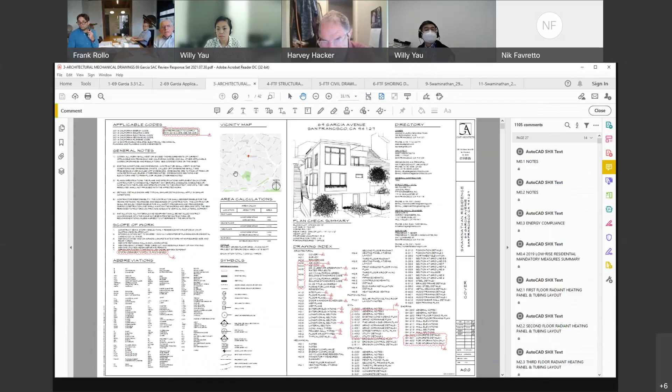We've gone through those, so there you go. If you go to 1.0 there, there you go. We have to get there. 1.0 shows the plan, and then you showed it, there was a photograph.

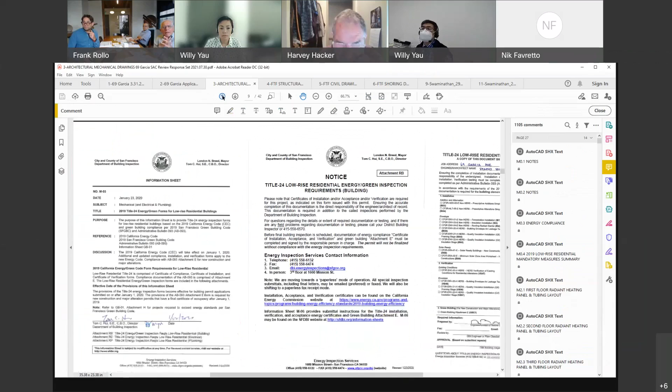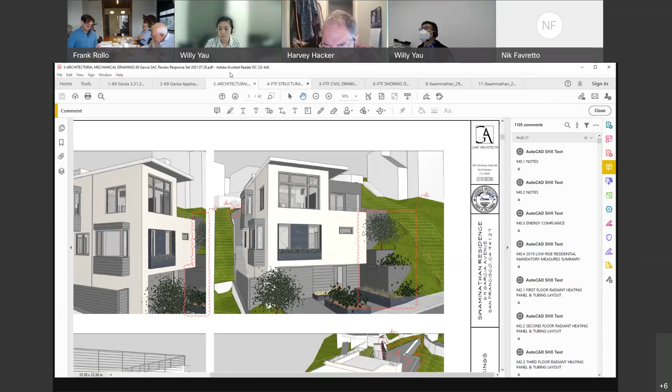Okay, so intent met. The next item is a geologic review.

Lou, there were various documents, but the one that's critical to the geology part. Do you have a copy of the minutes in front of you, Lou? Yes, I do.

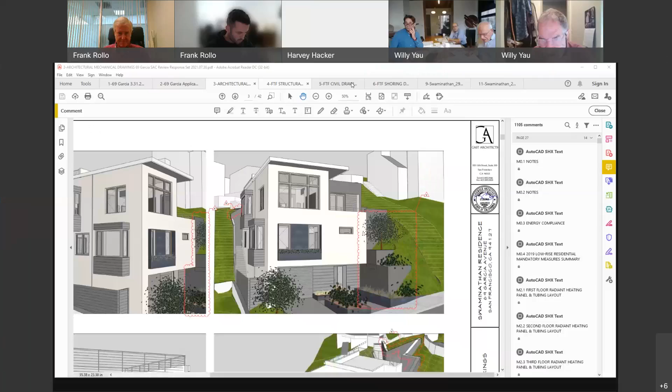Okay, so under geologic review, you had item 11, which basically discusses the characterization, and you requested documenting the existing conditions on a geology map, detail mapping of the chert rock. So maybe we can go to that document, and Lou will bring up the document, and there you go.

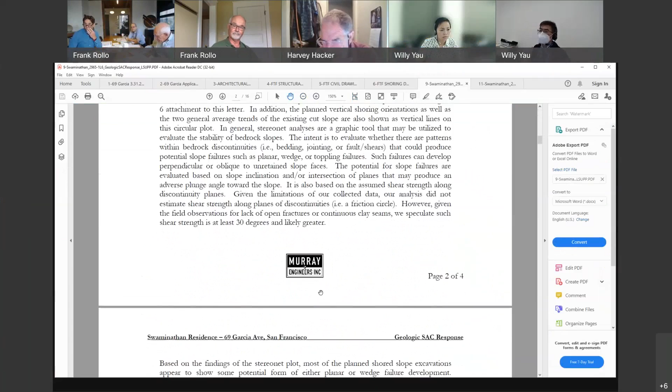And I guess the first thing we need to look at is the detail mapping, which would be figure 1. Thank you. Sure. There you go.

And then the second was the orientation of the bedding, and then we can go on from there. But go ahead, Lou, why don't you give your comments? Yep, thanks, John. Sure, everybody, for putting together your supplemental information. Appreciate that. I had a couple comments about it.

I think the main takeaway I get is, although you kind of discredit the whole procedure a little bit, I think the goal was to characterize the nature of the bedrock there in anticipation of putting in these 30-foot cuts, shored cuts. And I think what comes out of it is, although there are localized areas subject to raveling and sloughing and sliding and stuff, it's a ballpark estimate of the magnitude of those, the volume that's possible.

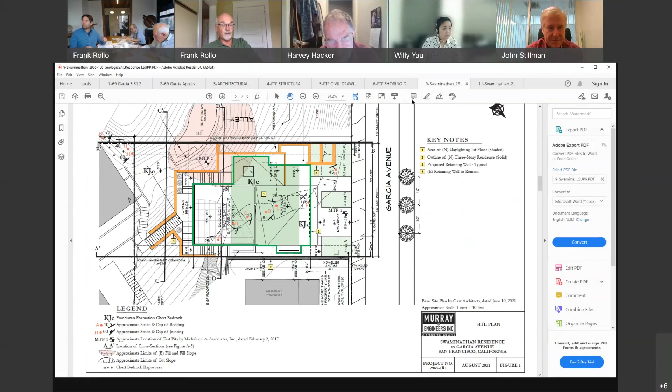Figure 6, the photo of the slide plane there, the rock scar. I'm not sure where that is. Yeah, that's at the base of an existing cut slope there.

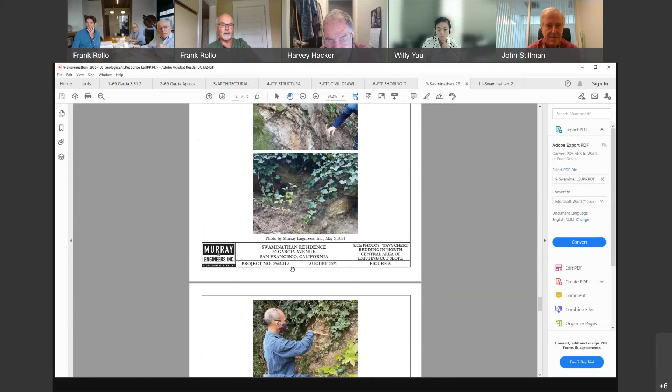We'll put that figure up. John, if you don't mind, we'll let Lou. Oh, sure, yeah, no worries. Yes, then you can comment too. That makes sense. Sure, there you go.

Is that Lou Gilpin standing there looking at that? No, it's rock. It's Mark Bauman from our office. Okay.

Okay, what did you want to say about that, Lou? Well, I think what would help the contractor and me would be some kind of a description of the joint spacing, the fracture spacing, the potential rock fall volumes. Because although it's going to be localized, a block that came out of that scar could take out two workers if it were in the wrong position.

And I think that was kind of the intent of trying to characterize the site hazards for the construction that's coming up. Typically you do that by saying, well, okay, here's a wedge failure, and here's the spacing on the various elements of the structure that allow 3-foot cubic foot blocks to fall out of it. Some of that information may be captured in the talus pile, and I know that's pretty much just real small stuff, but there may be a block or two sitting in there that could give you a hint.

Are you requesting that? Can I respond? Yeah, go for it, please. No, John. Yeah, Lou, it's really difficult.

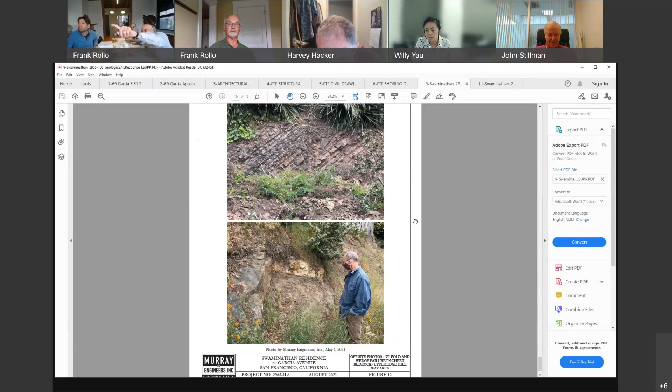I think when we went out there, we had a little bit higher expectation of trying to find more joint orientations on that existing cut. We didn't feel confident in some of the fractures we observed, so we really only had two primary joint orientations. I don't think we have enough information, given where the cut slope is at this point, to form an opinion as to the magnitude of a wedge failure.

Those two photos were taken near the quarry slope failure on the other side of Edge Hill Mountain, just to emphasize the magnitude of movement we may be looking at. The other photo above shows how wavy and lenticular some of the chert bedding can be.

My opinion is that as they're cutting, Lou, they're going to be doing a top-down construction approach. Having that shored really mitigates the concern. I don't think I have enough information to form those opinions in terms of the magnitude.

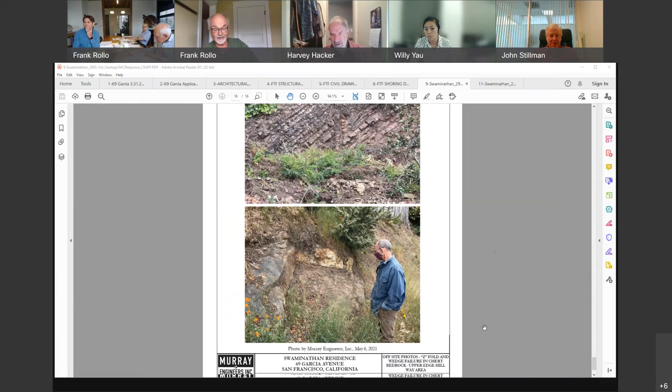Yeah, I was trying to put in site photos, I was contemplating doing it or not. Sorry to budge in there. It does say off-site photos there, Lou, on the title. Figure 12, off-site photos. Okay, okay.

So, well, Lou, go ahead. Moving forward, I still think there's a concern for letting the contractor know what kind of size issue they're dealing with. If you just put a pattern bolt set in there, you may hit one of these wedges, or you may not. I think it needs full-time observation by the geologist, and they need to spot the locations of the bolts according to the structures and bedding.

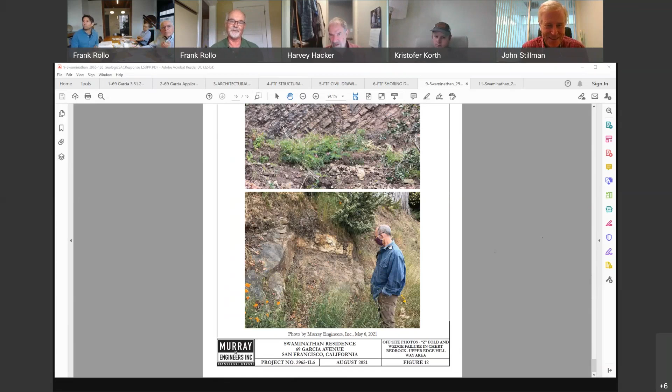And if that upper picture in figure 12, I don't know where to put the bolt. In the lower one, you get a hint that a block is coming out of there. So it's going to be hit and miss.

Sorry to interrupt. I agree, and that's what we state in our letter, that we would like to be out there full time to observe the cuts, and if we can provide information at that point, absolutely we would. It's really tough to figure this all out, but having us out there, if we see something adverse, we could raise it at that time.

I'm going to recommend, and I hope the SAC agrees, that the bolt pattern and spacing shown on the shoring drawings be interpreted as illustrative only, and that the actual spacing and angle of the bolt installation will be established during the excavation.

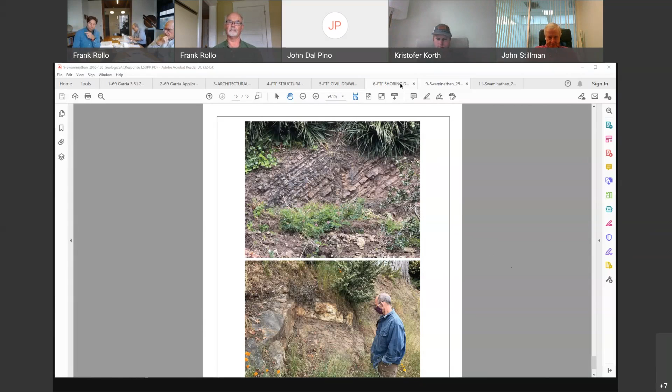How much of an angle change are you thinking might happen? Those things have to be built in advance, and it's not like every tieback can be at a different angle. I don't envision any angle change, but I need to put that in. Because you change one angle, it affects another tieback. It affects a lot of stuff. So no, that's a judgment call. I don't expect that to be the issue.

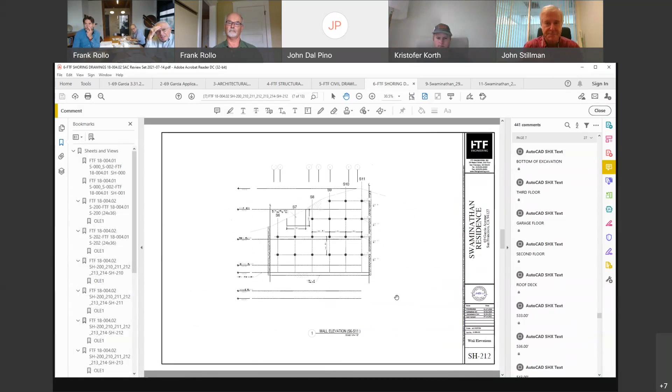The expression, to me, and I think to both Lou and I, it's a matter of you're going to come upon a wedge that if you keep excavating, it might fall and hurt someone. So you might want to move that bolt closer to the previous bolt, that kind of thing. Okay, and the other cut that needs...

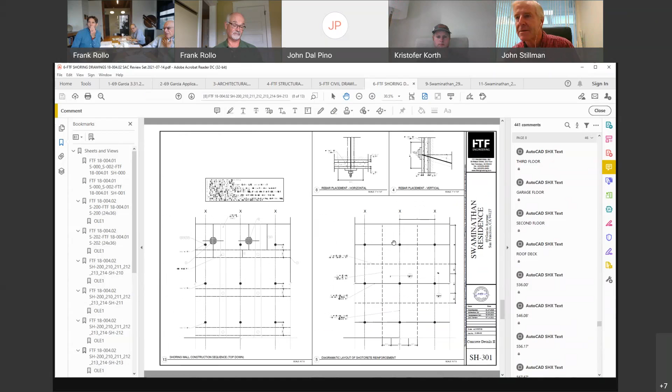to be looked at is the cut that, I think my orientation is right, is on the east side where you're coming up the easement to put in those soldier piles. We don't have soldier piles anymore, we just have the wall. It's a concrete wall. But you're making a cut there. Oh yeah, of course.

And to gain access to that, because you're so close to the residence at, what is that, 69? 69? We're 69, oh sorry. Well what I'm saying, John, 71. You've got a slope below that residence, and then we're gonna make a cut through in the easement. So it's important that cut be looked at also as part of the excavation, as part of the special inspection.

Yeah, okay, can we dive into where the cut is? Because my understanding is the cut's actually at the easement to subject property line, and that excavation into the easement isn't as extensive as we might assume it to be. Perhaps John and Matt might want to address that a little bit. I understand the shoring wall to be basically in the easement at the property line. Yeah, but so the cut though has to be a slope at that, isn't there a temporary cut being made?

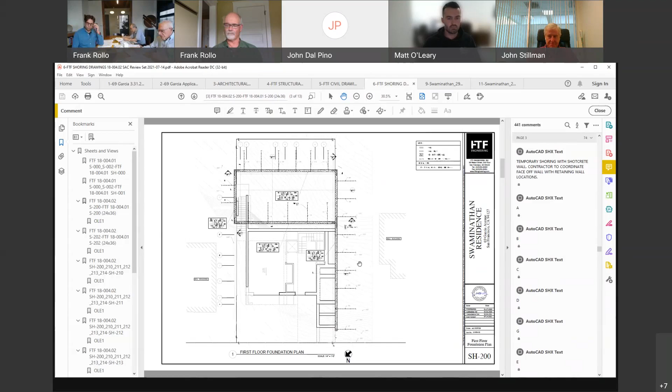So you're gonna come up through the center of the site to get to each level for the top-down work. Right. The last couple drawings in our set show the working from the top down, grading level, with increasing larger flat spots, the work starting up in the southwest corner and then working down. So that's SH 401. 400 shows the plan of how it looks, and 401 shows an idealized stepping down.

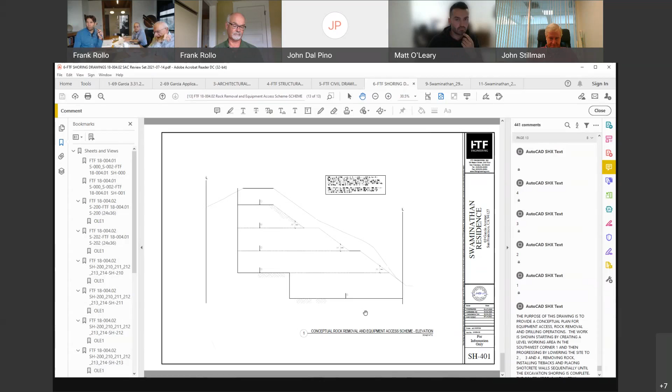So you're gonna walk up those inclinations, and then cut down and put your bolts, so your rig will sit on each pad as you go down. Right, and it's similar looking the other way, looking to the south. Okay, alright, so that explains it. Access through site, okay, not easement.

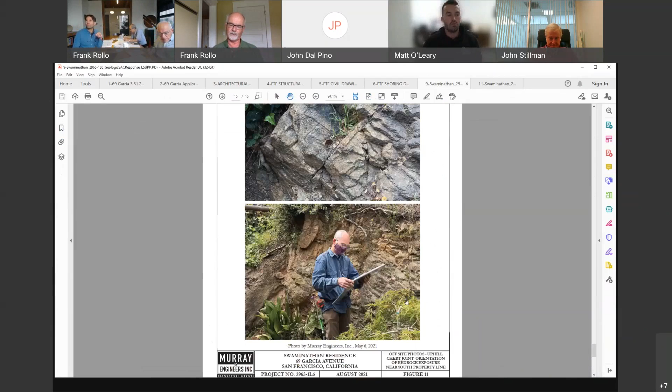Lou, any other comments on the geology? This may be a formality, and I noticed it on the original report too. John has a GE stamp, but there's no CEG stamp. Since this is a hillside ordinance kind of thing, I don't know if the county would require that, but that's just formality from my point of view.

He's got his CEG number 1869, and I think DBI will require that. John, you're gonna have to put your geology stamp on there too, for the May report as well. The May report and the August 2nd report. We can do that.

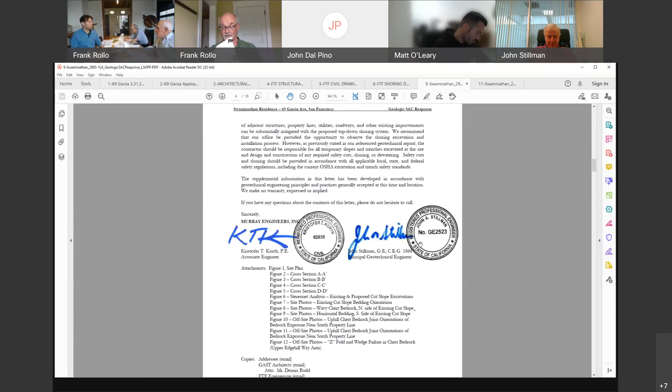The May one is 2018, isn't it? Yes, and then August 2021. Okay, yeah, I think so.

Other than making sure there are notes about continuous observation during rock bolting, I don't have any other comments. So provided that note is there, and it should appear multiple times on the SH drawings. For example, I'm opening SH 212. That note should be on that drawing.

I'm opening SH 210. That note should appear. And I believe there should be the special inspection observation form. You can show that, there's room on SH 001. You can put it on that drawing if you wish.

Check the appropriate box having to do with shoring and excavation. I think it's the excavation. I think it's on the structural. Yeah, I was gonna say, it's on the building structure. Yes, and the special inspection requirements are on the building structure set.

Does this need to also be on the shoring drawings? Yes, because you're gonna be making your cuts on that. It will be box number 12 and 13, and 21A. Yeah, okay.

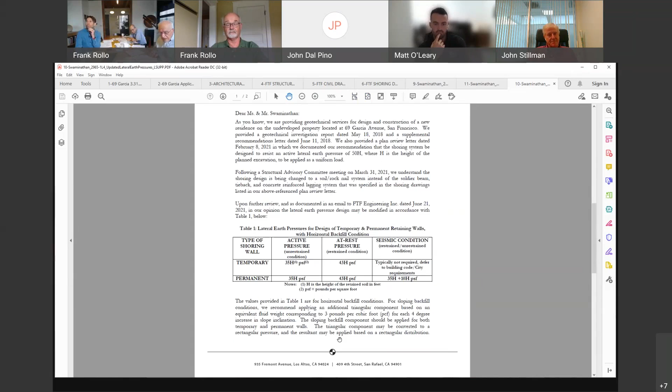Okay, letter number 11 is the geotechnical plan review letter. It's a 3-page letter, signed by Kristofer Korth and John Stillman, and the appropriate stamps are on that drawing.

Is that correct, or do we need the CEG stamp? No, you do not. It's fine, it's a geotechnical record. It indicates that Murray Engineers have reviewed the architectural, structural, shoring drawings, as well as the calculations, as well as the civil drawings.

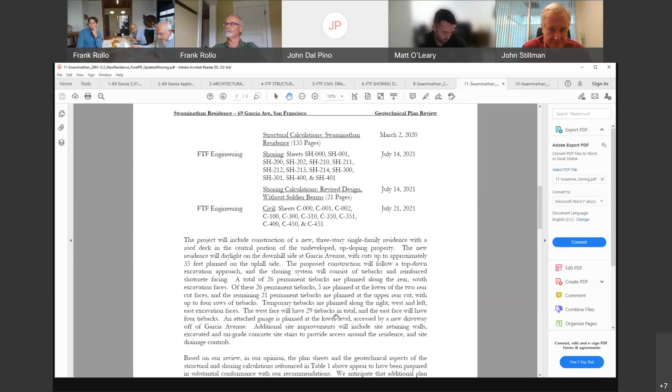Can we put that letter up on page 2? It says temporary tiebacks are planned along the west and east excavation faces. The west face will have 29 in total, and the east face will have 4.

I think I counted them correctly, and I agree with that. It may be that you may want to number them so that if there's an issue, if you number them on the drawing, when they make changes as to their location, they can just indicate what that bolt represents.

So I'm suggesting that the shoring drawings number the bolts in the elevation of the rock anchors, provide a number at each bolt, so that when the final report is sent to DBI for the occupancy permit, that as-built drawing will show the same bolt numbers, and if there's any changes, you'll see where the change occurred.

Okay. On that same letter, the paragraph starting 'based on our review,' it says we note that the foundation contractor is responsible for the stability of all temporary excavations at the site and the impact on the neighboring structures, property lines, and utilities.

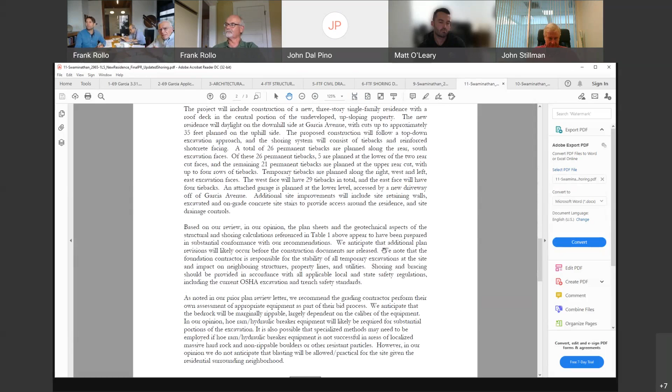I think we can modify that statement, though the exact locations and inclination will have to be surveyed in. Right now the soil bolts are part of the design, the numbers are part of the design, all that. What we're saying is how you get there, how you do it is your responsibility, but you're going to put them in where we tell you to put them in. I understand the concept. We can work on rewording that. Thank you, and so that's an action item.

Also, this is a hard one. The last paragraph on page 2, I guess this is where the driller - Matt, you're on, but John, this is both you guys - it says we anticipate the bedrock will be marginally rippable, largely depending on the caliber of equipment. In our opinion, hoe ram and hydraulic breaker equipment will likely be required. It is also possible that specialized methods may need to be employed if the hoe ram and hydraulic breaker are not successful in areas of localized massive hard rock.

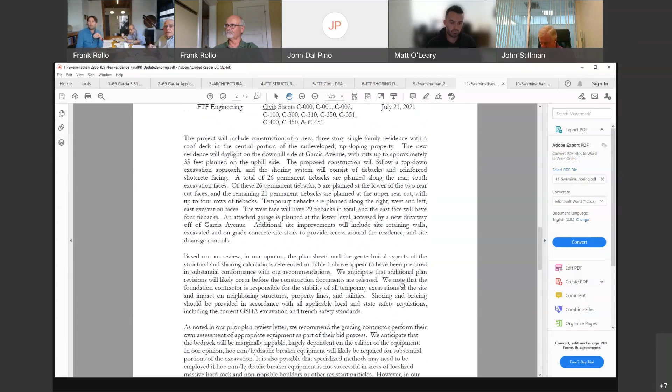As far as I'm concerned, the Murray engineers have adequately addressed their review and cautioned the contractor as to the difficulty of excavation. The only item that needs a modification is what I'd call the third paragraph, where stability is discussed - well, it's the second paragraph starting with 'we note that,' and the third paragraph starting with 'we anticipate that.' Is that correct? Correct, those two sections, yes.

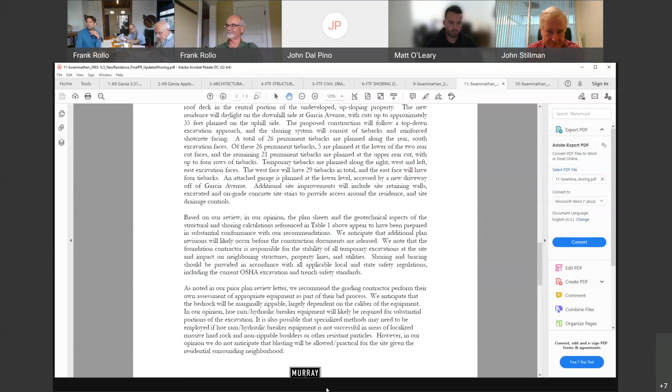The scope is tailored to a drilled soldier pile, and I recommend to the SAC that we request a new proposal, and that the cost of monitoring be realistic and not overly conservative. I would suggest that you keep the seismograph on the site throughout the excavation process - I think it's a couple of months - and he's giving you a continuing monitoring cost for that. Is that acceptable, and I know the owner's not on, but will you convey that to the owner, Dennis?

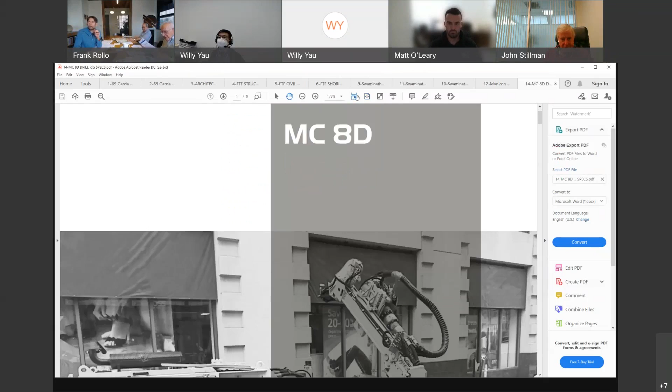Document 14 is a fact sheet on the type of drill rigs being proposed, for all the tieback work. Document 15 was the earth retention, I guess, for erosion control and measures.

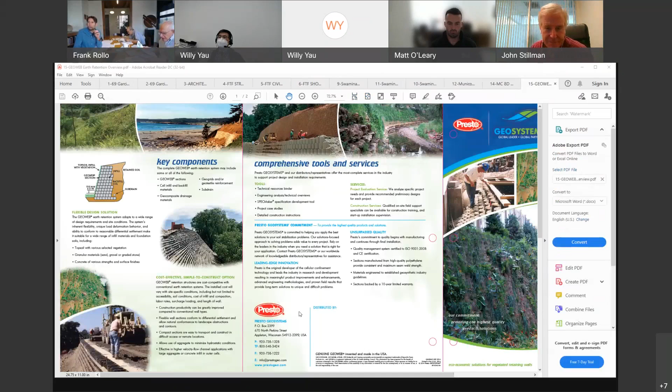Item 16 is a shoring for excavations within the street. I guess that document is something that's done between you and the city. Correct, this is a sample exhibit that we'll have to do with the Department of Public Works.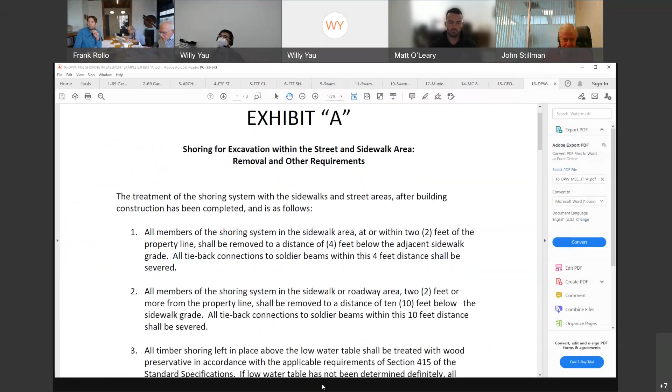And number 17 is a lateral tieback agreement and a consent to use the crane, and that's really beyond the scope of the SAC, so I have no comment.

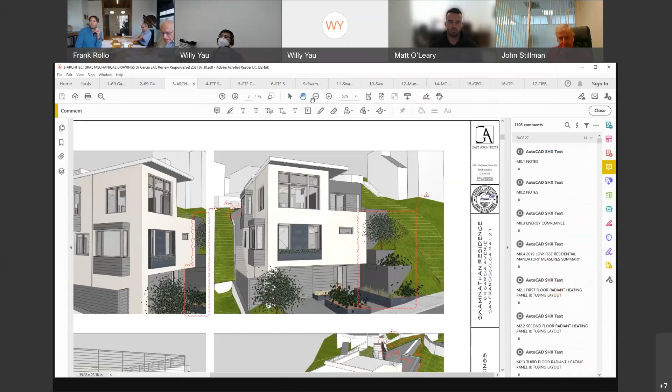Okay, and that's it. Now we can go to the drawings, so we can walk through those at a pretty good pace. Let me keep my organization here. Okay, so the next item I'd like to discuss is the civil.

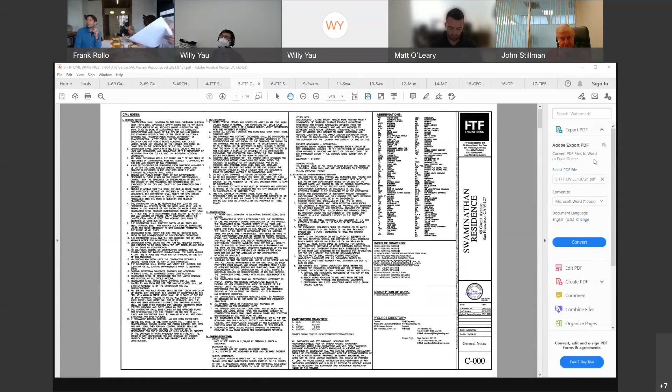We don't have a civil member of the SAC, so I will ask everybody to put up the civil drawings, they're number 5. We do, Skye's on the call. Thank you, hi Skye.

Would you do me a favor, Skye, on your drawing? And I'd like this to occur on all plans. For some reason the H line, which is a very important grid line because you have a wall behind it, is not shown. We show the A, B, C, D, E, F, G, but I'd like the H line to be shown, especially on your civil drawings.

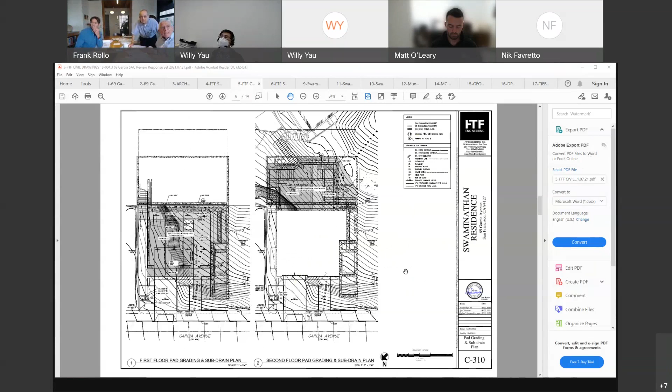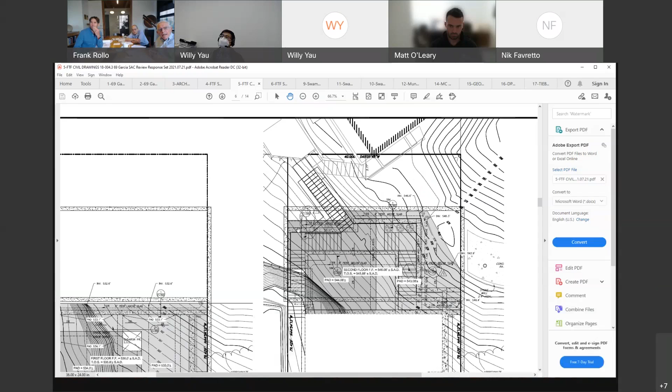If you look at C310, for example, see where the stairs are located? That's the H line. No, up there, the ones that go east-west. See the wall right there? That's the H line. I think it's important we show that line in all the drawings.

Skye, are you muted? Oh yeah, I can add that. Okay, no worries. And if you look at the shoring drawings, it's the same thing. For example, SH202 shows the F and the G, but not the H line, where there is in fact a significant wall. I would note the H line is missing also from the architectural drawings. We'll add them there. I don't think the civil shows any grid lines for that matter, so if we're adding the H, we're adding all the grid lines, not just the H.

Can you do that? Yes. Is that difficult to do? No. Okay, that way everybody out there knows, hey, we're working along the H line. Anyway, it would make it easier. For dumb geotech minds like me, it helps.

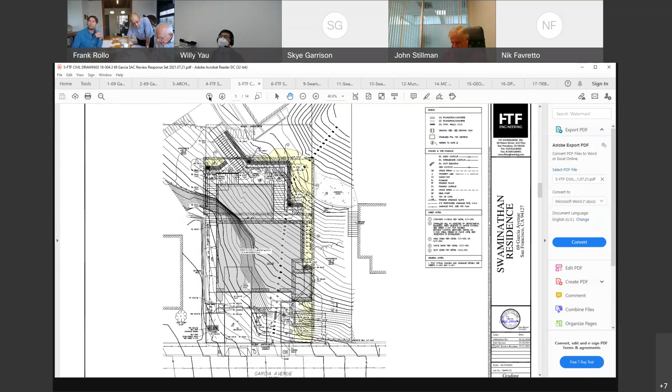Let's go on. The other thing, Skye, on your drawings I would like a note 9 under excavation, underpinning, and shoring. It'll be note number 9 that states something to the effect that all excavation shall be performed under the full-time observation of the CEG.

And number 10, all tiebacks, installation will be observed—tieback testing will be observed by the geotechnical engineer. I guess that should also go on the shoring, but we'll get to that.

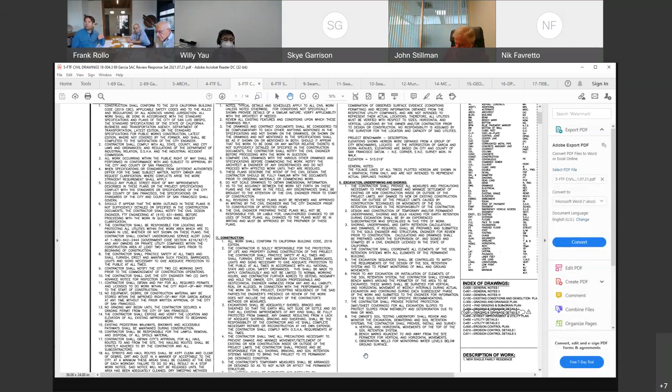Frank, this is John, are you talking about Skye's drawings, the civil, or mine? I'm talking about Skye's, on sheet C000. Okay, I'm just wondering if that's redundant, because Skye's work doesn't really start until my work time, all the civil stuff is being done. But she has a section 5, which is excavation, underpinning, and shoring. I'm just wondering if maybe that's redundant. It's not.

It is redundant, but since it's there, no need to take it out, just add a note 9 saying all excavations shall be under the full-time observation. John is right, you don't have to say anything about the tiebacks, just observation by the geologist, full-time observation.

I don't want it, it's hard to have all the language in reports and different sets of drawings say exactly the same thing, exactly the same way, so redundancy. Dennis, can you make sure that we say the same thing on all drawings? Yes, okay.

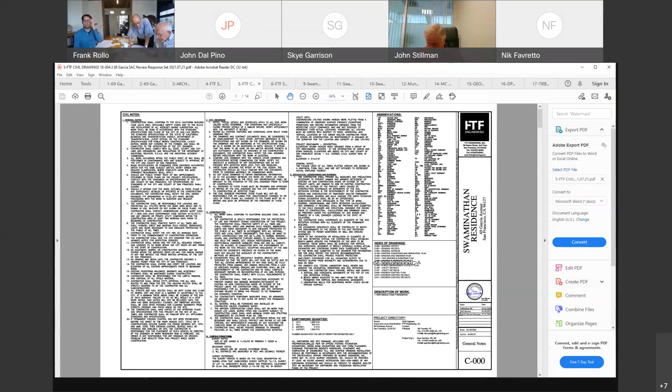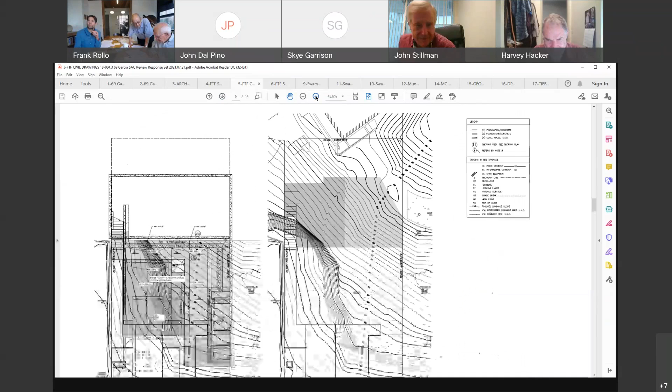C3, the retaining wall, drawing C350. I'm sorry, C310. That's very hard to pick up in this drawing, the subdrains. And to me, that's what's critical on these drawings.

So perhaps, for the benefit of those of us that wear glasses, if you could indicate—they sort of get lost along, for example at the H line, behind the H line it's sort of lost in there. I see the cleanouts. Anyway, if you can somehow just bold those a little, however Skye would like to add clarity to the subdrains is fine with me.

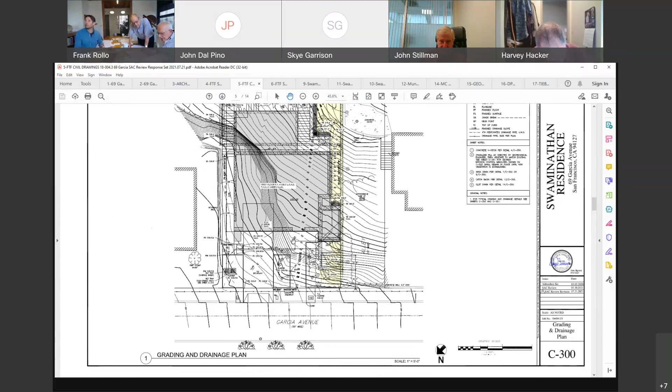She used color on the previous plan to indicate the geogrid material, and that really stands out nicely. Whatever you think, Skye, to better illustrate the drainage. Yeah, I can make the lines colored and bold.

The shoring wall is going to have more of a weep through the wall that's more continuous than a solid pipe at the bottom, which is why you don't see a pipeline behind that wall. Okay, so you'll be taking these drains, taking everything to Garcia, so you're going to have penetrations.

How do you take them through the wall? The shoring wall will weep through, and there'll be a gravel pocket between it and the house wall, which has the subdrains at the bottom.

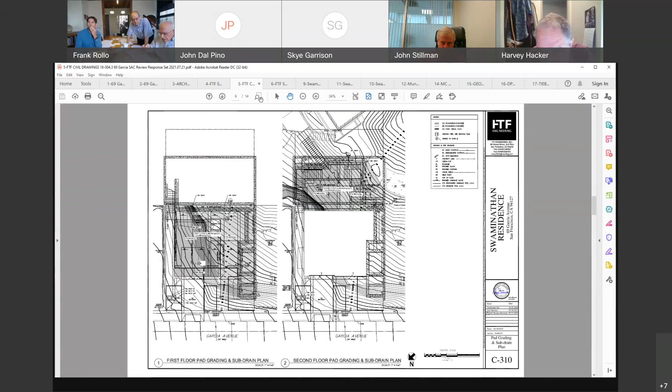Okay, but what about the H wall? You've got a whole series of walls, and only the H wall has the void, the fill in.

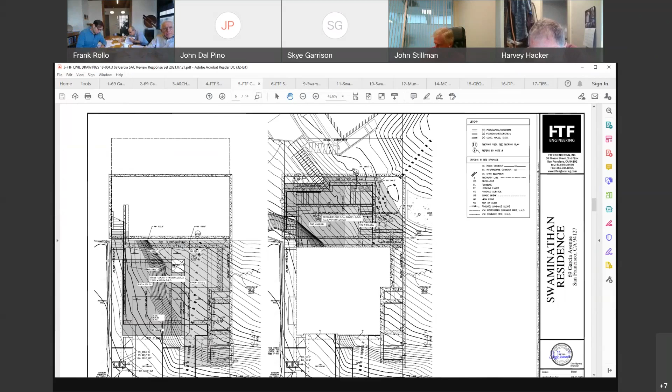Maybe we should wait till we get to the shoring drawings, but I'm asking about the penetration details—how you take the subdrains from behind the wall to the street. Those are going down under the mat slabs, and then there's piping that goes to the left side of the site.

It goes under that walkway on the left to those catch basins and the planter by the street. So you're penetrating through the mat, or putting them under the mat? They'll be under the mat. We added a couple details showing how the pipes get below the mat. Could you put up C350?

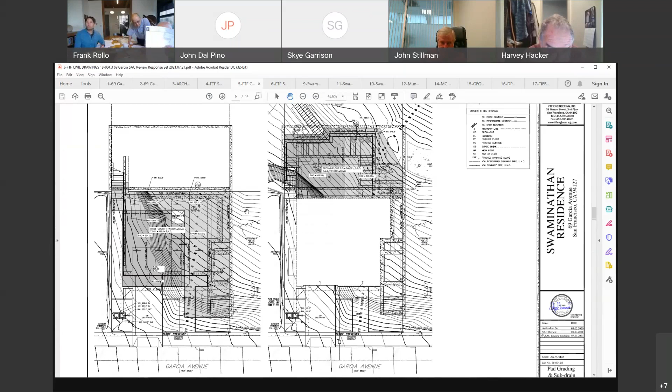There are the details. Now, which one shows how you get under the mat? We have detail 11 and 12, which takes the subdrain that's behind the wall and ties it into the drain below the mat footing. Oh, I see. 12 is up there at the back wall.

We have the pipe coming down through the footing slab. Oh yeah, okay, I see. And then that runs under the mat all the way to the catch traps and whatever. Okay, got it. Well, thank you.

As far as a member of the SAC, you responded to all the issues I had regarding civil and drainage. Do any of the other SAC members have any comments regarding the civil drainage? Not hearing any.

With the changes we've discussed, no further review is needed, and I'll frame that in the final. We've dealt with the architectural. The next one is the shoring.

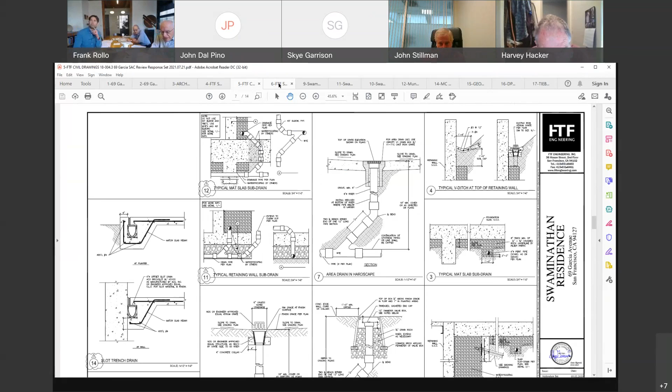You're on, John. Well, I can see it's completely different from the last time we met. We're changing into a different system, which is why I wanted to illustrate it a little with a couple samples. Apparently, this is the way to go.

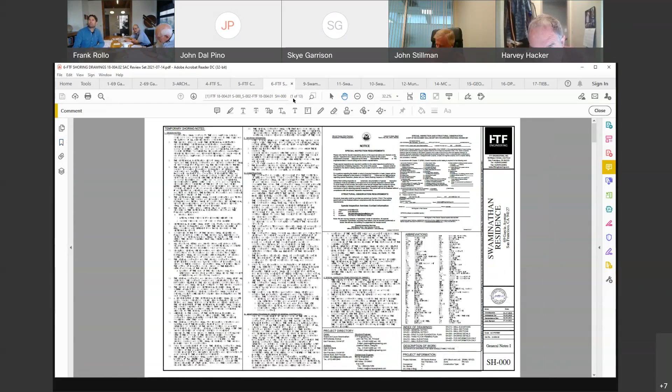But the only thing I noticed is the spacing is basically a 7x7 grid. Most of the jobs I've done in my whole career used 6x6 maximum. I wonder if this spacing change could affect safety, or violate OSHA, I don't know. But I've worked many jobs, all using 6x6 grid maximum. So this is apparently about sometimes 7x7, but not all 7x7, only certain areas. So the question is whether the spacing is adequate, if it's permissible.

Well, I guess, John, as a member of SAC, I think because we put the requirement that the bolts will have to be located with guidance from the geologist, the 7x7 is the maximum spacing they can allow, but the geologist may in fact require closer spacing in some locations, and that's why it's important to have a numbering system.

So I don't know, Lou, do you agree there isn't any OSHA requirement as far as bolt spacing, but you're right, it's very common to use 6x6. In fact, I've used 4x4. Lou, are you comfortable with the 7x7, knowing it's going to be observed full time?

Yeah, I am. There's some huge loads on those bolts. I imagine the designs compensate for the spacing, and if they go 6x6, there's going to be very little room to move them around and optimize them. It's just going to be crawling over yourself. I understand what John's saying.

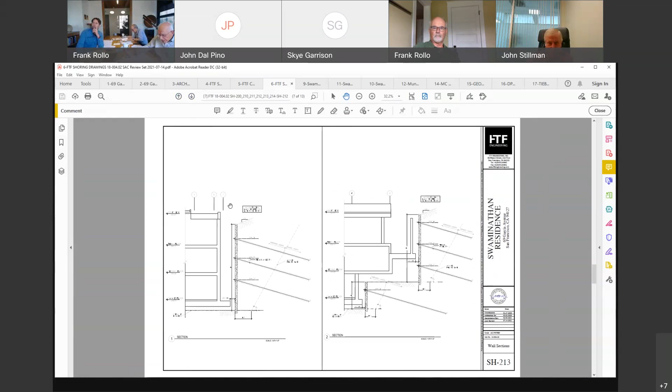Would you mind adding a note that the tieback installation and testing will be observed by the geotechnical engineer? I will if it doesn't already say that. I'd be surprised if it doesn't.

It says the geotechnical engineer shall submit a complete report on the tieback testing to the shoring engineer and the shoring subcontractor as soon as possible following completion of the work. It's implied, but not stated directly. So maybe the lead sentence would be that the geotechnical engineer shall observe the drilling and testing, and then the second sentence would be that he's got to report it. Yeah, that's fine, I can do that.

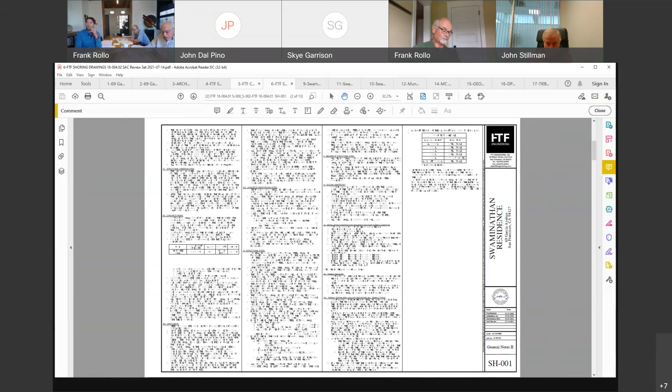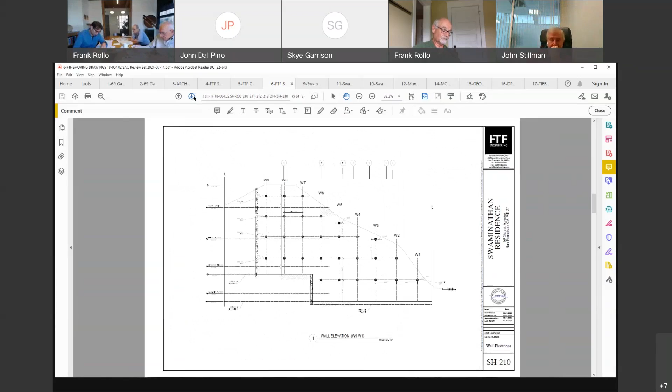Thank you. And also, if we go to drawing SH210 as an example, what's not shown, I'm just using this drawing, are weep holes. There are no weep holes shown in this shotcrete wall. Well, we showed it on a detail that shows the Miradrain that we put, and I think we showed the weep holes there. Okay, would you be kind enough to point that out to me?

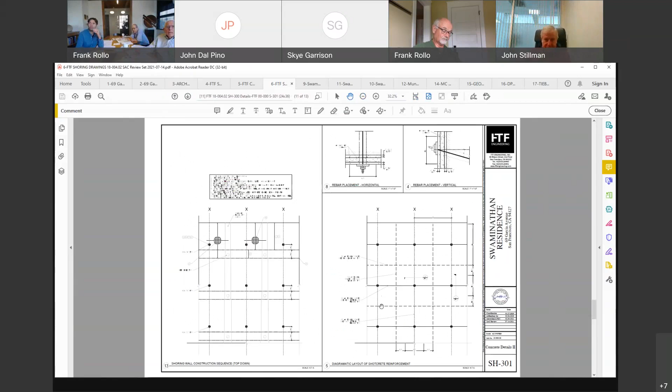It's on one of the new sheets. Keep going, Dennis. Go back one. Well, we introduced a strip of Miradrain there, that's a chimney drain between. Zoom in on the detail on the left, if you would. It's just a 4 foot wide, or 2 foot wide, that's all you need, like a chimney, draining it down. Yeah, well, that's what we have. So it's dotted there, the dark dots are the tiebacks, and then there's the Miradrain going down. SH301 is the weep hole.

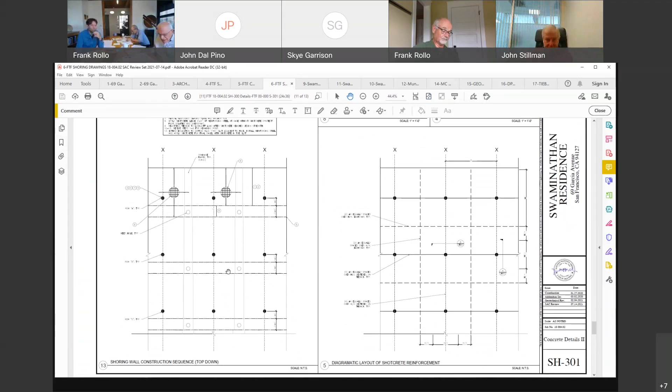Okay, I think it says it right here, weep holes typical. Yeah, but what it doesn't show is the strip drain. Normally, would you put a strip drain behind? You hang a strip drain, and then you have the weep hole. So if you've got 7 foot spacing, you'd have a strip drain in the center at 3.5, and it's usually 2 feet wide, John? Yeah, 2 foot wide, adequate. It's just a chimney down to the bottom. Yeah, well, that's what is shown.

And back to the inside. Oh, I see what you've done. Oh yeah, there it says drainage fabric typical. Now, does that occur here, these lines? There's your chimney, the intent's for it to be everywhere. So that's on all shoring walls? How do I know that? It just says shoring wall construction sequence. So the contractor's gonna know that. Yeah, I hope so, but I can write 'all shoring walls.' Yeah, please.

There was an incredibly large slide that occurred on Edgehill a long time ago. Lou can give you the history of it, but we're just taking the precautions that are needed.

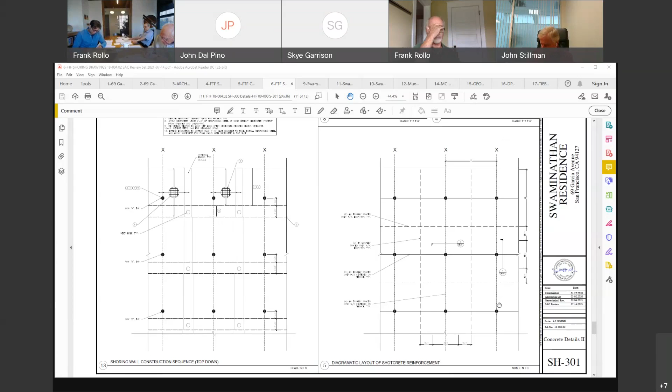We're not gonna lock off the earthquake load, that's fine. You have to lock in some load, otherwise the slope will slide down. We're designing for 80% of the actual soil pressure load, and the tiebacks are designed for all the other stuff. So for the lateral earth pressures, you compute a load and lock off at 80% of that. Right.

So, John, you don't have any other comments on the shoring? No, I don't, it's very well designed. Well designed, so make sure that gets in the documents, okay? John will put his stamp on it with you, John.

So the only action item required on this is to show the chimney drains detail, add the note about observation by the geotech, and add the H line.

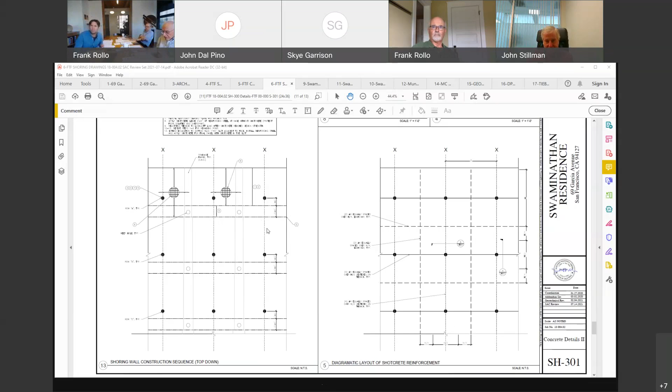Okay, the last document is the structural. Nik, you're on, and John, do you have any comments? No, I don't, the buildings are well designed, well fortified. Structural.

So the only comment I have is show the H line. Is it missing also in my drawing? No, yours has it. Oh, yours say that. Yeah, mine has it, yours has it too, wow, there it is. I like the H, there you go.

Now, I don't recall the letters you refer to. You know what would be helpful to DBI? If you could put on your drawings, Dennis, the geotech letter, review letter.

Put the same letter on the shoring, so it's part of the documents and not something floating around in the ether. On the structural and shoring, sure, because he's got to sign off on both. Not the architectural, just the shoring and the structure, correct.

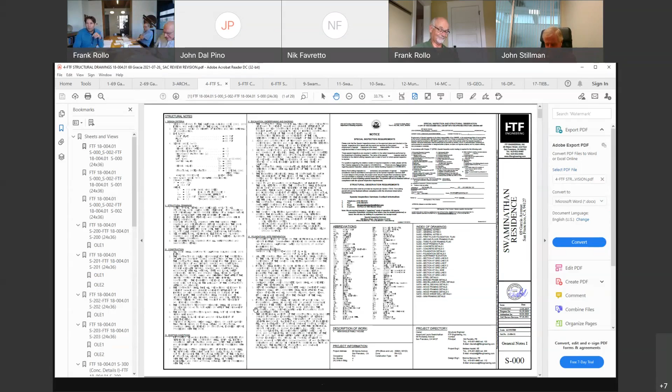Under foundation and site preparation, note 2: use the word 'geotechnical engineer shall observe and test.' We do that. Observation test.

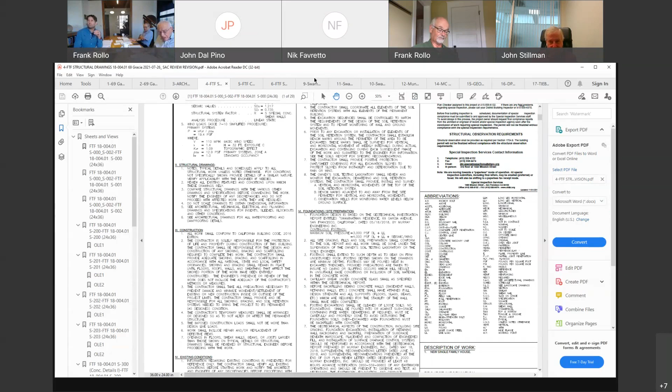At this point, Janie, Willie, do you guys have any questions you want to ask the designers regarding the project? I do not. Karen, do you have any questions? No, I did not. Was Karen on? Yes. Hi, Karen. Yeah, she's been on the whole time.

Willie, do you have any additional questions for the project? He might be on another call. Not sure. Excuse me, I'm talking muted. Sorry that I was absent for the last 20 minutes.

Briefly, we've signed off on all the plans with some minor changes. We're adding some notes, some grid lines, and we have more discussion on the drainage pattern, with some minor changes to that. But in essence, from a geologic, geotechnical, architectural and structural standpoint, we've basically completed our review and agree that the design is well designed structurally and from a shoring standpoint. The architecture is consistent with the owner's request, and the civil is consistent with the site conditions. Do you have any questions before I go on to the next section?